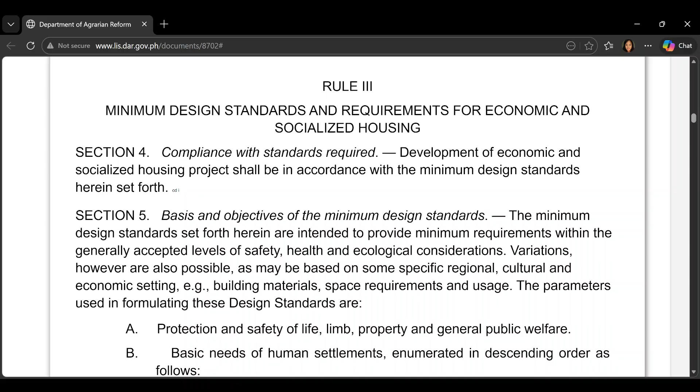Section 5. Basis and objectives of the minimum design standards. The minimum design standards set forth herein are intended to provide minimum requirements within the generally accepted levels of safety, health, and ecological considerations. Variations, however, are also possible as may be based on some specific regional, cultural, and economic settings, e.g., building materials, space requirements, and usage.

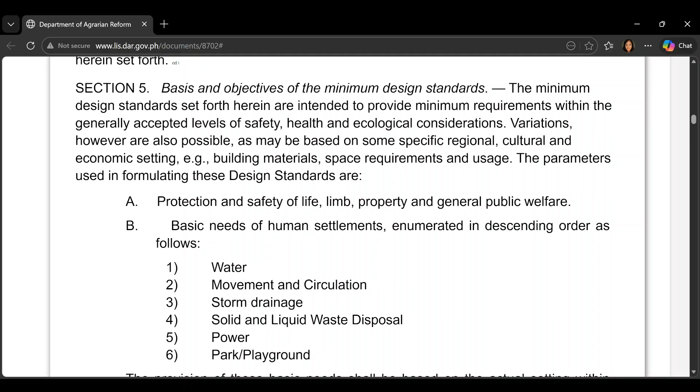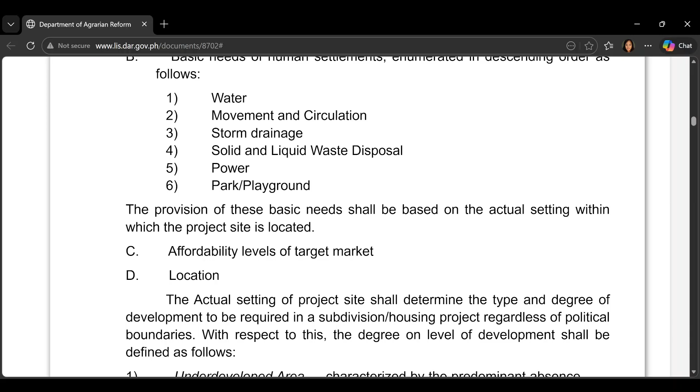The parameters used in formulating these design standards are: A. Protection and safety of life, limb, property, and general public welfare. B. Basic needs of human settlements, enumerated in descending order as follows: water, movement and circulation, storm drainage, solid and liquid waste disposal, power, park and playground. So those are the 6 basic needs. The provision of these basic needs shall be based on the actual setting within which the project site is located.

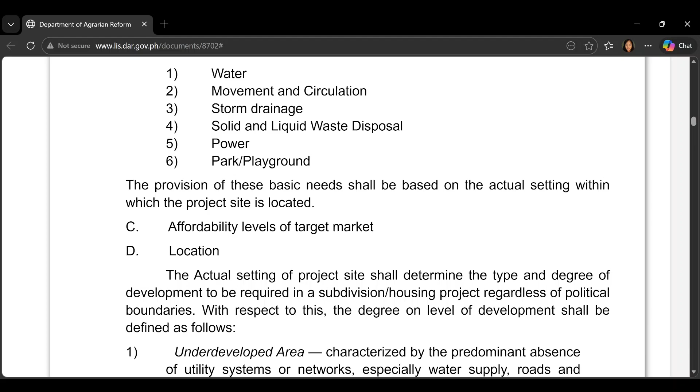C. Affordability levels of target market. D. Location. The actual setting of project site shall determine the type and degree of development to be required in a subdivision housing project regardless of political boundaries. With respect to this, the degree or level of development shall be defined as follows. 1. Underdeveloped area, characterized by the predominant absence of utility systems or networks, especially water supply, roads, and power. 2. Developed area, characterized by the predominant presence of utility systems or network, especially water supply, roads, and power.

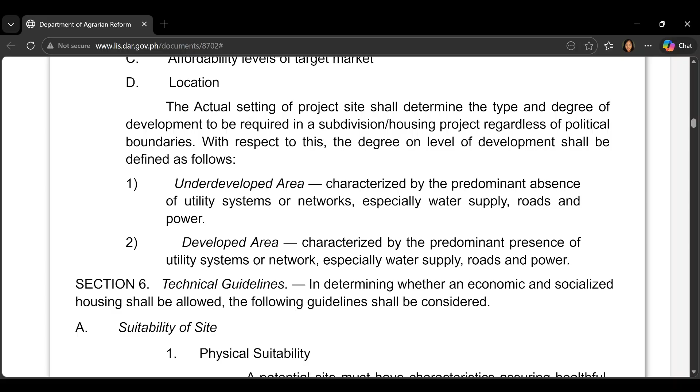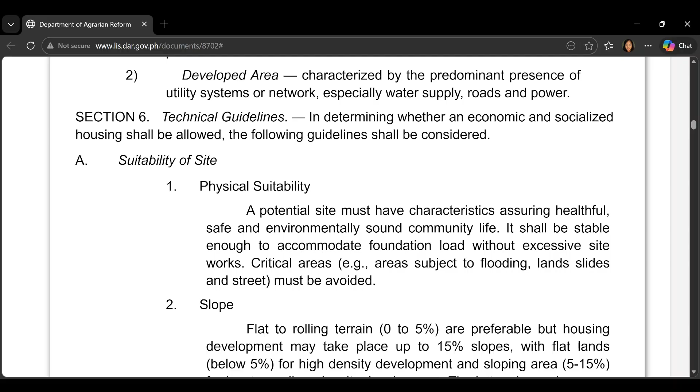Section 6. Technical guidelines. In determining whether an economic and socialized housing shall be allowed, the following guidelines shall be considered. A. Suitability of site. 1. Physical suitability. A potential site must have characteristics assuring healthful, safe, and environmentally sound community life. It shall be stable enough to accommodate foundation load without excessive site works. Critical areas, e.g., areas subject to flooding, landslides, and street must be avoided.

2. Slope. Flat to rolling terrain, 0 to 5%, are preferable, but housing development may take place up to 15% slopes, with flat lands below 5% for high-density development and sloping area 5 to 15% for low to medium-density development. The latter slopes, however, should be capable of being developed for habitation at reasonable cost with assurance of stability for vertical construction. 3. Availability of basic needs. The prioritized basic needs cited earlier shall preferably be available within reasonable distance from the project site. But where these are not available, the same shall be provided for by the developer.

4. Conformity with the zoning ordinance or land use plan of the city or municipality. Generally, housing projects should conform with the zoning ordinance of the city or municipality where they are located. However, where there is no zoning ordinance or land use plan, the dominant land use principle and site suitability factors cited herein shall be used in determining suitability of a project to a site. Furthermore, if the project is undoubtedly supportive of other land uses and activities, e.g., housing for industrial workers, then said project shall be allowed.

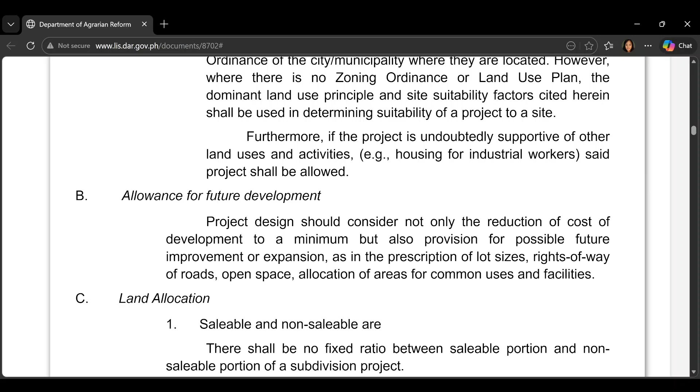B. Allowance for future development. Project design should consider not only the reduction of cost of development to a minimum, but also provision for possible future improvement or expansion, as in the prescription of lot sizes, rights of way of roads, open space, allocation of areas for common use and facilities. C. Land allocation. 1. Saleable and non-saleable areas. There shall be no fixed ratio between saleable portion and non-saleable portion of a subdivision project.

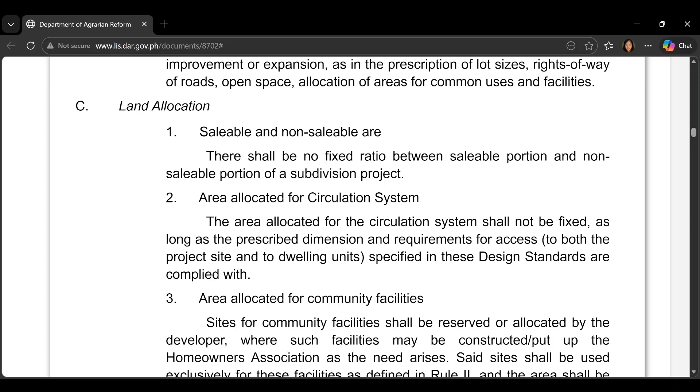2. Area allocated for circulation system. The area allocated for the circulation system shall not be fixed as long as the prescribed dimension and requirements for access to both the project site and to dwelling units specified in these design standards are complied with. 3.

Area allocated for community facilities. Sites for community facilities shall be reserved or allocated by the developer where such facilities may be constructed, put up by the homeowners associations as the need arises. Said site shall be used exclusively for these facilities as defined in Rule 2, and the area shall be exclusive of that area intended for park and playground.

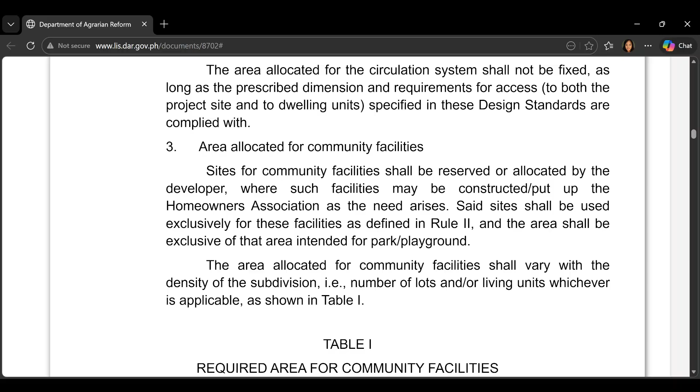The area allocated for community facilities shall vary with the density of the subdivision, i.e. the number of lots and/or living units, whichever is applicable, as shown in Table 1. Table 1, required area for community facility according to density: for the number of lots and/or living units per hectare, like 150 lots or living units and below...

1% of the gross area of subdivision is area for community facility. So if 151 to 225 lots or living units per hectare, then 1.5% of gross area of subdivision are areas for community facilities. Above 225 units, it's 2% of gross area of subdivision.

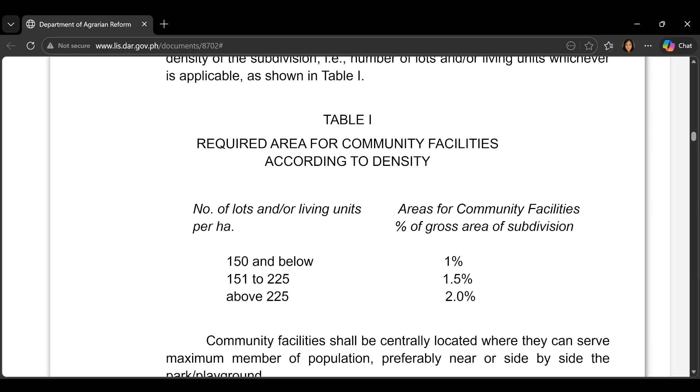Community facilities shall be centrally located where they can serve maximum members of population, preferably near or side by side the park or playground. Four: area allocated for park and playground.

Provision for park and playground is required in all cases. Allocation of areas for parks and playgrounds shall be exclusive of those allocated for community facilities and shall vary according to the density of lots and/or living units in the subdivision, whichever is applicable, as shown in Table 2.

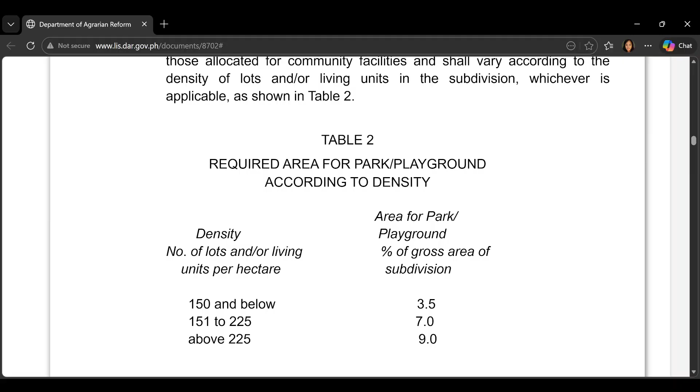Table 2 is the required area for park and playground according to density. Similar to a while ago, 150 and below lots or living units per hectare, 3.5% of gross area of subdivision should be area for park and playground.

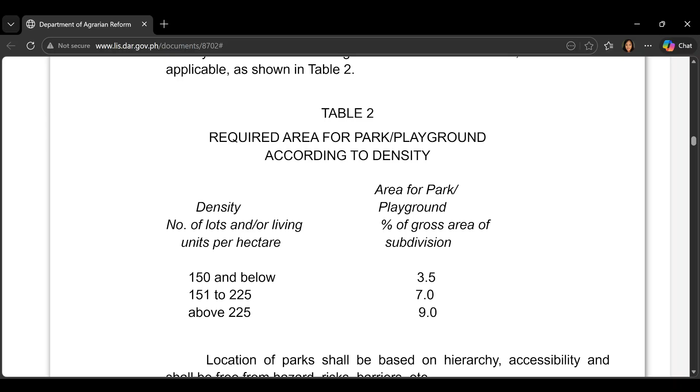For 151 to 225, 7% of gross area of subdivision should be an area for park and playground. Above 225 lots or living units per hectare, you need 9% of gross area of subdivision for park and playground.

Location of park shall be based on hierarchy, accessibility, and shall be free from hazard, risks, barriers, etc. Landscaping, sodding, and tree planting shall be done by the subdivision developer owner. Minimum size for a pocket park is 100 square meters.

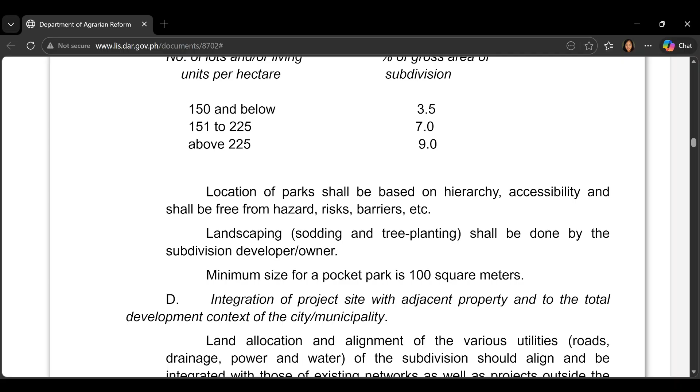D. Integration of project site with adjacent property and to the total development context of the city or municipality. Land allocation and alignment of the various utilities, roads, drainage, power, and water of the subdivision should align and be integrated with those of existing network as well as projects outside the boundaries of the project site, e.g...

Access roads, road connecting project site to the nearest public road should follow the standard specification of the MPWH. Hierarchy of roads with respect to function and dimension shall be observed when planning the road network within the project site, such that no major or minor road aligns with an alley or footpath.

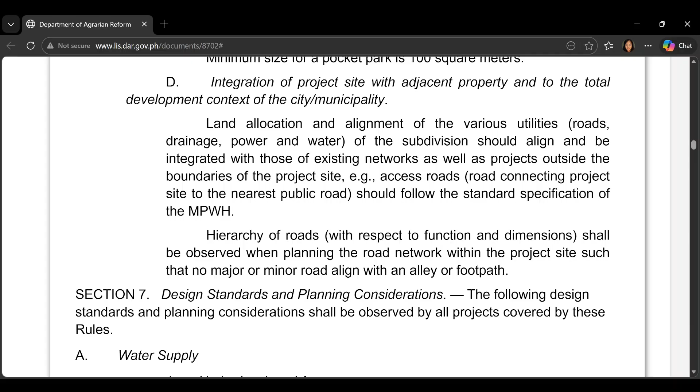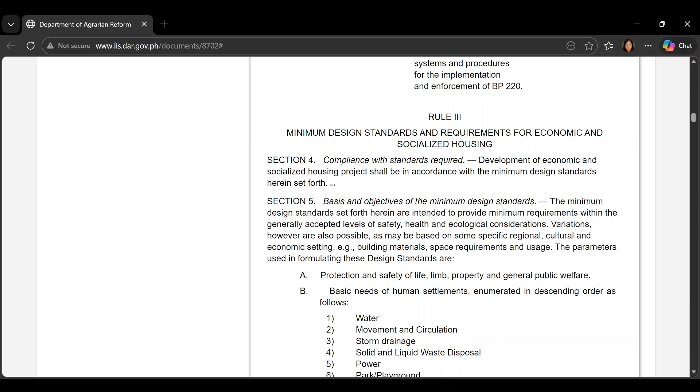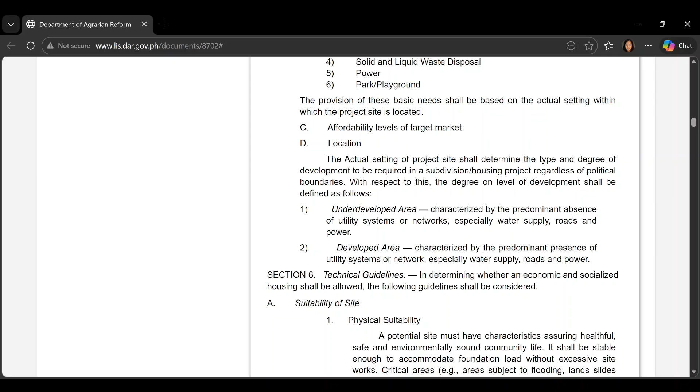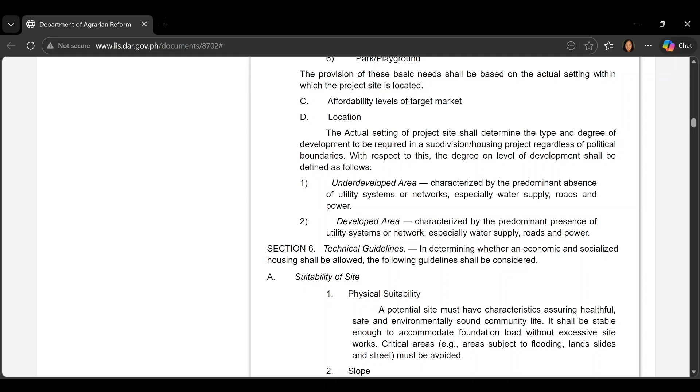So before I go to section 7, let me zoom out a bit to remember the context of what we just read. Again, we are discussing Rule 3 of BP 220. Under Rule 3, there's Section 4 and then Section 5, which is already the basis of minimum design standards. Section 5 has A, B, C, D. Now we're in Section 6 for the technical guideline. Section 5 is more of the parameters or basis of how we came up with the minimum design standard. Section 6 now is what is allowed in terms of technicality.

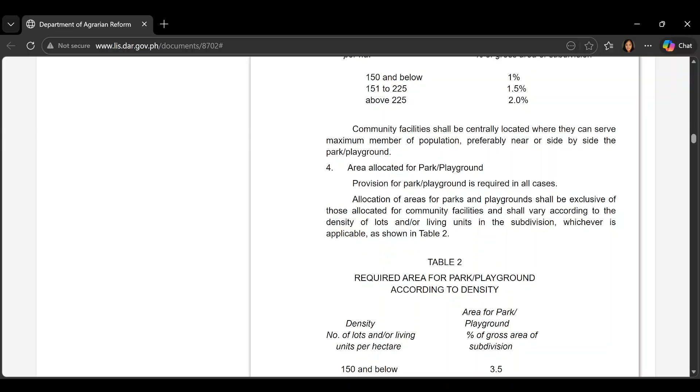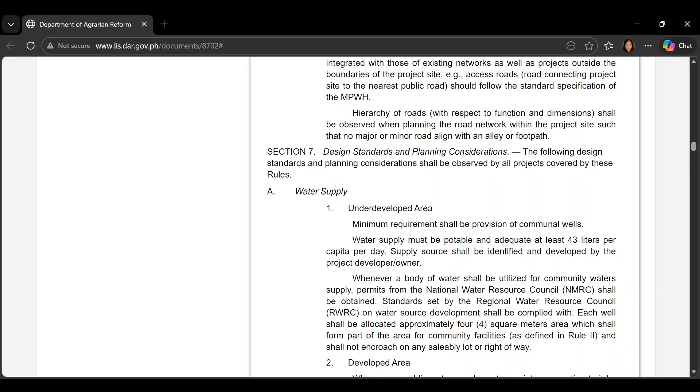So we read A, about the suitability of the site, B, allowance for future development, C, land allocation, and then we also read D, which is the integration of project site to adjacent property. And then we're going to discuss Section 7. So after technical standard is the design standard and planning consideration.